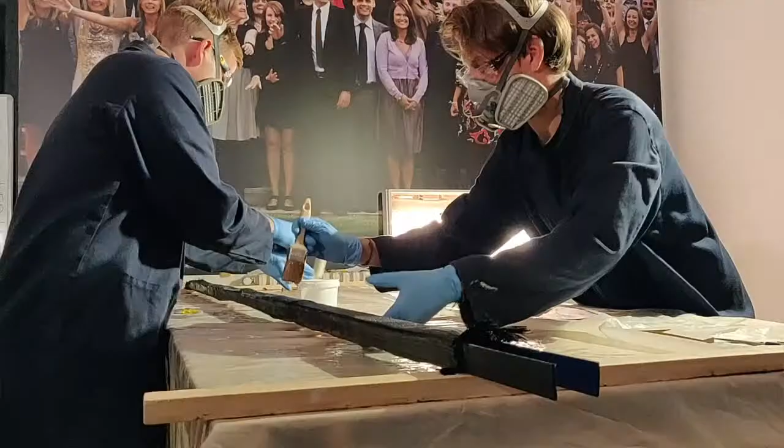Do I see hydrogen as the future? Very difficult for me to predict, but I'm pretty sure it will be one of the more important fuels this world will run on, besides others like electricity, wind, and the powers of nature. I really do believe it's important to invest in innovative aviation, because aviation, traveling, flying, is in our genes, and if you can do this in a more environmentally friendly way, I think that matters for us, but also for the generations to come.

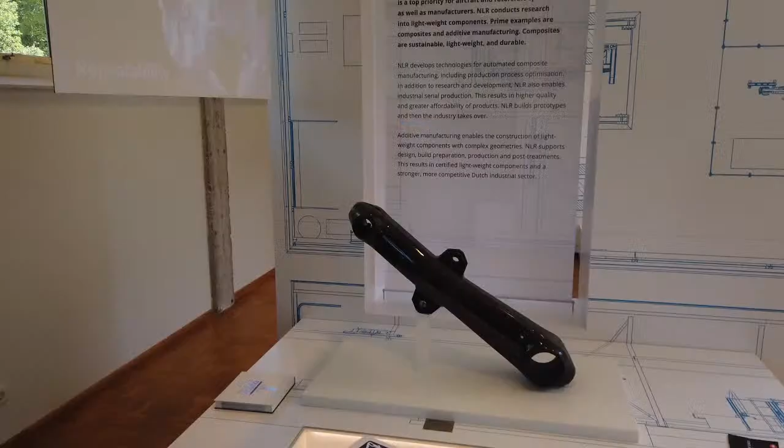The Royal Netherlands Aerospace Centre is an ambitious knowledge organization for more than 100 years. 2 years ago, we became Royal, and we try to contribute to make aerospace more sustainable, more efficient, more effective, and of course, safer.

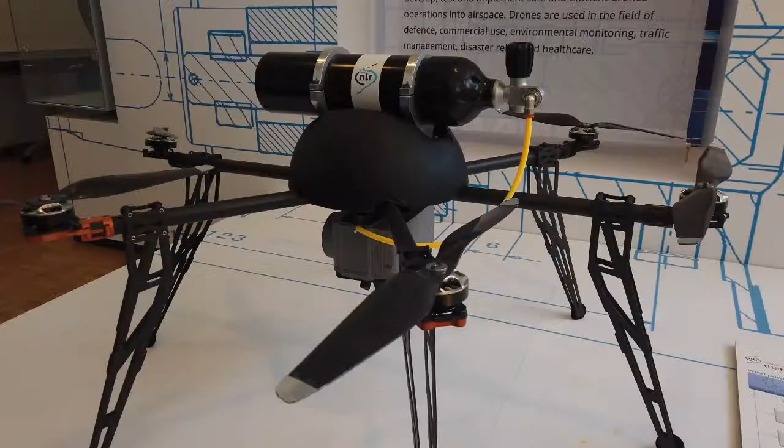Well, I think testing is the key thing. If you're not able to test, you can't improve your system, you can't improve the processes. And of course, the main thing is, I think, you will learn from your failures. And if you're not making failures, you won't learn. So testing is key. And it's not just one time testing, testing, testing.

My name is Henri Werij and I'm the Dean of the Faculty of Aerospace Engineering at Delft University of Technology.

Being a university and a Faculty of Aerospace Engineering, our main focus is to educate new students, bring them the right knowledge, the right mindset, DNA, and to do state-of-the-art research, and have impact on aerospace worldwide.

Try new things, try risky things. I'm not talking about safety, but technically a bit risky, and you bring parties together. I think this is something really wonderful about what AeroDelft is doing as well. You bring together students, people from our faculty, but also industry. Actually, you bring the whole ecosystem together, just like what we are doing in our Aerospace Innovation Hub.

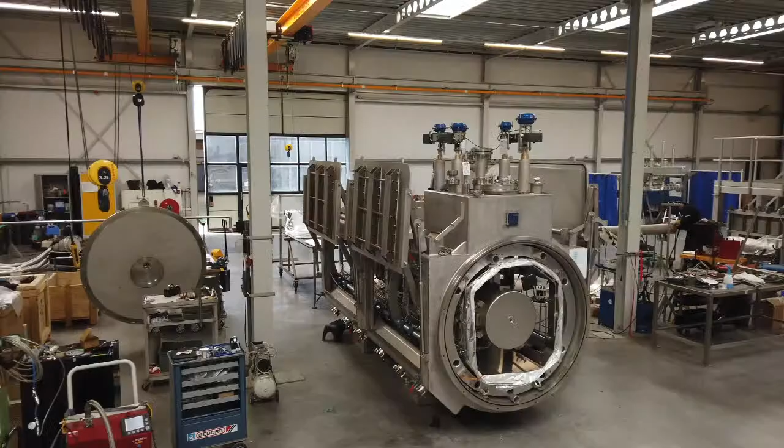Hydrogen has some particular risks, and that is it explodes quite easily. But as long as you keep it contained, the risks are really very low. You have to observe certain extra measures compared to standard fuels like gasoline or kerosene. But once you do that, it's a safe fuel. It's not more unsafe or less safe than gasoline.

Rotterdam The Hague Innovation Airport is an innovation platform for sustainable aviation. For sustainable aviation, it's very important to continuously innovate.

One of our iconic projects is SAF, Synthetic Aviation Fuels. Our partners within RHIA, the airport, Zenit, SkyNRG, Uniper, they try to realize a demonstration plant for synthetic aviation fuels which are circular.

We are an aircraft leasing company in the sense that what we do is we manage aircraft for investors that seek to find an acceptable return by investing in aircraft that are leased to these airlines.

It can't go on like this, and so there's, I guess, a human desire to do something good for humanity. As we can at least see it now, it looks like hydrogen-powered aircraft are the future.

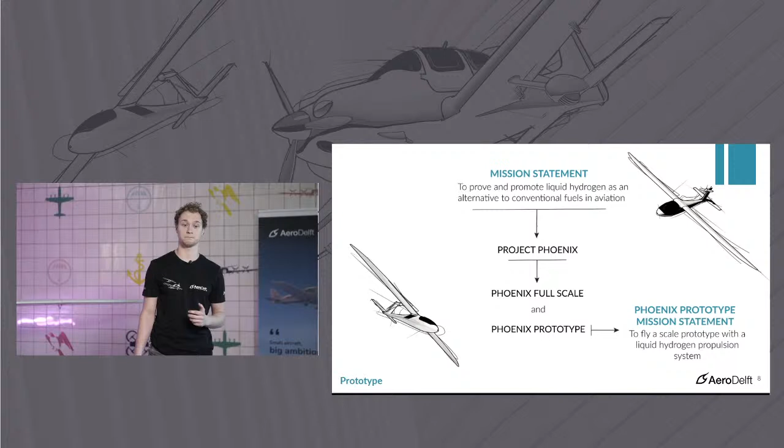So the Phoenix Prototype, or PT for short, is a 1:3 scale E-Genius glider plane with a max takeoff weight of 50 kilograms, a wingspan of 5.7 meters and a length of 2.7 meters. Although it's a drone, it's still a pretty big boy. Ultimately she will be flying with 3 different propulsion configurations: first batteries, then gaseous hydrogen, and then finally liquid hydrogen.

So here is a rough timeline of what we will be doing. Like I said, we're ultimately going to be flying, but that will be coming next year. In these past years we've made great progress to ultimately take to the skies. From the founding of Project Phoenix in 2019 to about a year ago, we consider that the initiation and design phase. This past year we consider the production phase and subsystem testing phase. Next year we will enter the full system testing and flight testing phase.

So like I said, this year was the production phase. Earlier this year I had the honor to reveal to you the prototype aircraft. At that point it looked beautiful, but it was not fully ready yet to take to the sky. We had major parts of the airframe, but it was not nearly at a point that we could take off. So since then, we have been taking big steps to be able to fly.

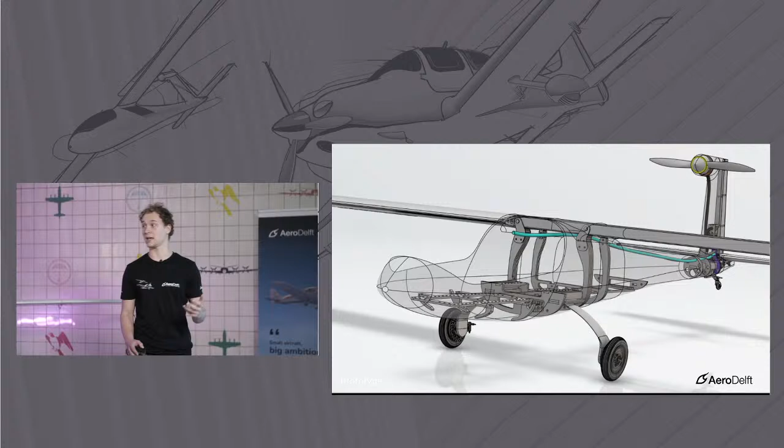It's a similar story for our tail landing gear. Here you see a drop test, and it flexed way more than it should have. But we don't see this as a failure, we see this as a learning moment. Like they said at the NLR, you need to test and test and test to be able to make a better product.

So we went back to the drawing board, designed new landing gear, and ultimately we created this. Here you can see the new landing gear leg, which dwarfs the old landing gear leg. We really believe that the new landing gear legs will be able to take the force that they will need to.

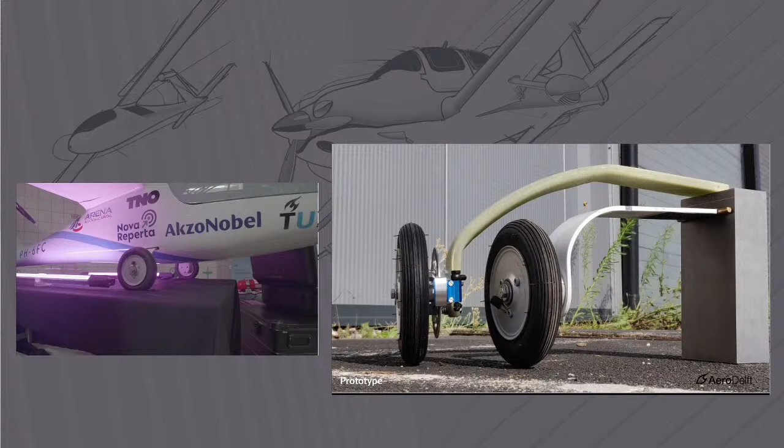So now you can see right here next to me is the prototype aircraft. If you zoom out a little bit, you can see that the aircraft looks quite similar to what it looked like when we first released it. But there's many different changes that have been made now. It looks quite similar, but it's now much closer to being ready to take to the sky.

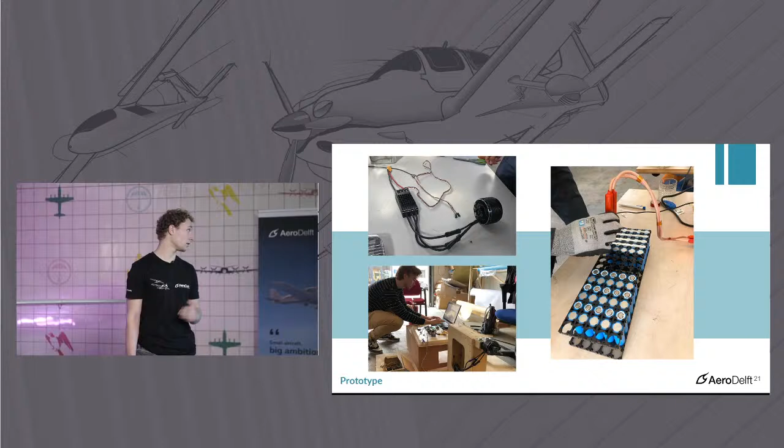In addition to all of the structures department progress, the electronics control department has also been making a lot of progress. We have most of our hardware done now. The motor is in, the electronic speed controller, and also a lot of the circuit boards and wiring has been completed. We also recently built our cruise battery, which will be the main replacement for our battery-only flight for the fuel cell. But much of electronics and control development is designing these circuit boards and wiring diagrams and coding, and more coding.

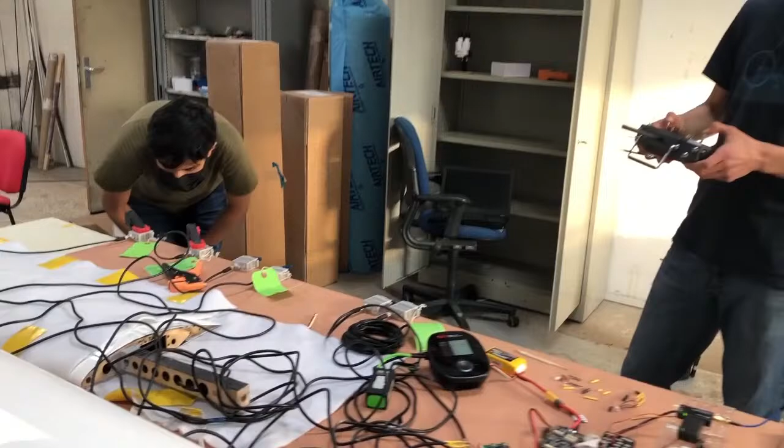There's not a lot very interesting to show there visually, but ultimately that all culminates in tests such as what you see here. This is one of our servos tests. The servos will allow us to move the control surfaces of the aircraft from the ground. Tests like these are very valuable for us to understand how these systems work, make sure that they work well, and also prepare them for integration.

We've also been doing a lot of extra testing at the electronic control department. Here you can see a photo from right before our prototype of prototype test. We dubbed it this because we are taking some of the control elements from our Phoenix prototype aircraft and putting them in an even smaller aircraft to test them.

Tests don't always go exactly the way we want them to, but like I said, we learn from them, we improve, we continue, and ultimately we're able to take to the sky, as you can see here. This was some footage from this test, and this allows us to understand much better how these systems will work when we actually integrate them into the aircraft. We can make sure that the modes that we were working with and everything is up to par.

Also recently, we had the chance to be able to start testing our motor. The motor is quite powerful, and at the testing, we were really interested to see how powerful this was. Also, tests like this allow us to get a feeling for the temperature that these get to, which is of course very important when we integrate it into an enclosed space.

Ultimately, after that test, we integrated that into our aircraft. That was a really amazing moment, and really here you see the melding of the structures department and the electronics control department. So what we did here is we did some of our first taxiing tests.

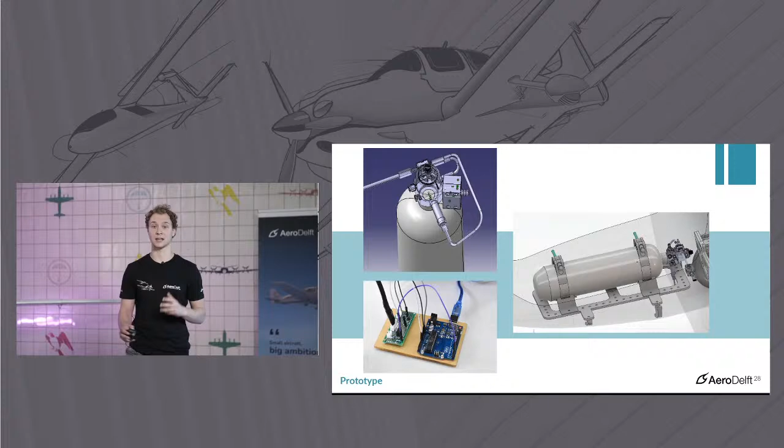In addition to all of the great progress that has been made regarding electronics and the structure, we've also been taking big steps regarding our hydrogen propulsion systems. We have two systems we're working on, our gaseous hydrogen system and our liquid hydrogen system. Regarding the gaseous hydrogen system, we have basically finalized the system. All of the electronics and the integration and also the components that allow all the components to work together are all now done. Also, we've been able to test the hydrogen propulsion system many times now.

Specifically, the fuel cell has been run many times, and we are very comfortable with it. Also, thanks to our partner NLR, we've been able to run the full system outside of the aircraft, and we've now reached a maximum power of 1500 watts. Right here next to me, you can see the gaseous hydrogen system. Soon, after our battery-only flight testing, this system will be integrated into the aircraft and will serve as the main power source. We're very proud of the progress we've made here thus far.

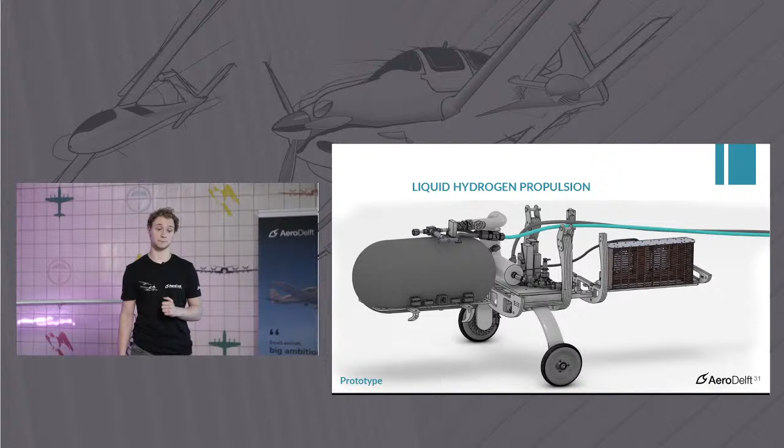So then, our final step, liquid hydrogen propulsion. The liquid hydrogen system has many complex pieces of machinery. The main one is, of course, the tank. Building a tank for liquid hydrogen is not very easy and requires a lot of precision. Luckily, after some learning moments, we believe we can now build this tank flawlessly. Also, the inlet to the tank, which is very important when working with liquid hydrogen, has now had its design finalized, and we will soon be able to begin production.

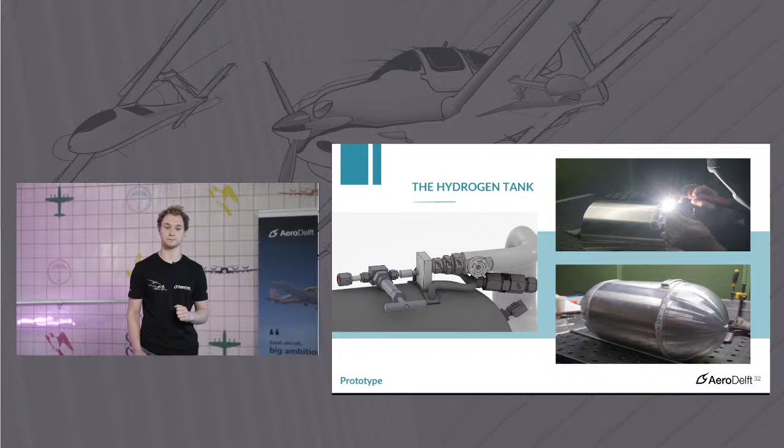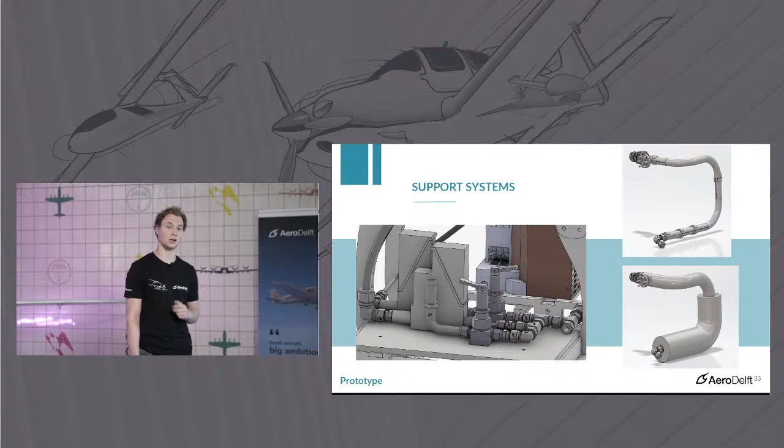There are also many support systems within the liquid hydrogen propulsion system. These require a lot of engineering work, and without them the system would not work. Here you can see two of these elements. First, the valves assembly, a subsystem which will regulate the pressure of the hydrogen in the system. You can also see two images of the heat exchanger, which will heat up the very cold hydrogen in the system. These are some of the main elements of the hydrogen propulsion system, including the fuel cell, which I already said we are very comfortable with. All these elements together will allow us to fly on liquid hydrogen. This really is a one-of-a-kind system, and we're very proud of the developments we've made here. This is really cutting-edge technology, if I say so myself.

So ultimately, for all the things I've talked about to be able to fly, we've been looking into certification. This is, of course, a very important thing. Certification includes documentation, safety analyses, registration, and testing, testing, testing, in the famous words of the NLR. Later in this event, we will have a panel discussion where you'll learn more about what they do and the challenges they face.

So that was a brief overview of the progress we've made this year. So much was done by the amazing prototype engineers that I couldn't cover today in this short presentation. But for now, we focus on the future.

This presentation, sadly, is a little— oh, this is perfect. I got some information that the presentation was old, but they fixed it, which is amazing from our technical staff. But so we look towards the future, like I said.

We will be having three separate flight testing phases, as I discussed earlier. First, we will be flying on battery power. During this flight, we are really trying to test the electronics and make sure our aircraft is a good testing bed for the future hydrogen propulsion systems. Then the next phase is gaseous hydrogen. As I already showed, the gaseous hydrogen system is nearly ready and will be integrated into the aircraft after we complete our battery-only flight testing. This will mark AeroDelft's first gaseous hydrogen flight.

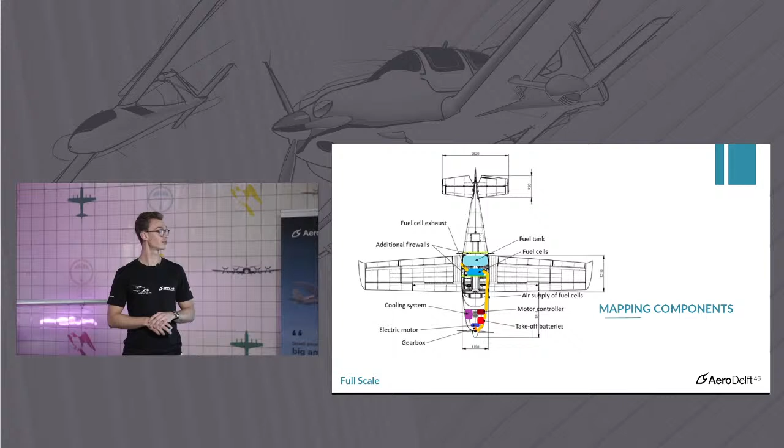The air that is needed is supplied from the front of the aircraft, where you also have our batteries and electric motor located. Of course, it was time for us to move on and really get started with the work itself, so we started making connections with companies, because our aircraft can only fly on hydrogen with very advanced technologies and lightweight components.

To put our needs into perspective, our Phoenix prototype needs 1,500 watts to take off, whereas our Phoenix Full Scale requires 100,000 watts of power just to take off, which is 60 times as powerful.

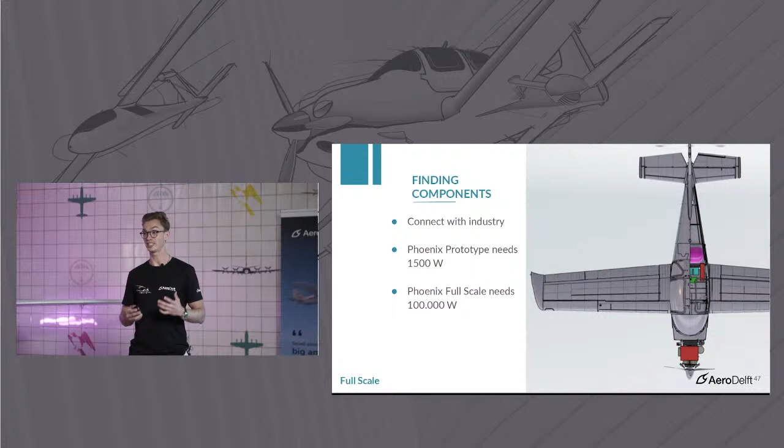But when you're looking for more power, you're also looking for more trouble, and this is something we definitely experienced. Our fuel cell system, this blue box you see right here, was 170 kilograms, and it did not fit in our aircraft. We felt lost and thought, how are we going to make this work?

We decided to do what we engineers are good at: think outside of the box. We literally came to the conclusion to take apart this box, and so we did, together with PowerCell, which resulted in the following: all the hydrogen components were placed in our hydrogen area and isolated from the cabin with a special wall called a firewall.

Of course, to produce electricity we also need air in the most perfect condition. Those components are placed in the front of the aircraft. But we also need hydrogen.

So let's take a look at the next puzzle piece, which is our hydrogen tank. This is the tank we selected. It can store 1.25 kilograms of gaseous hydrogen under a pressure of 350 bars and has a total mass of 30 kilograms. Together with Luxfer, we are adapting it to the needs of Phoenix Full Scale.

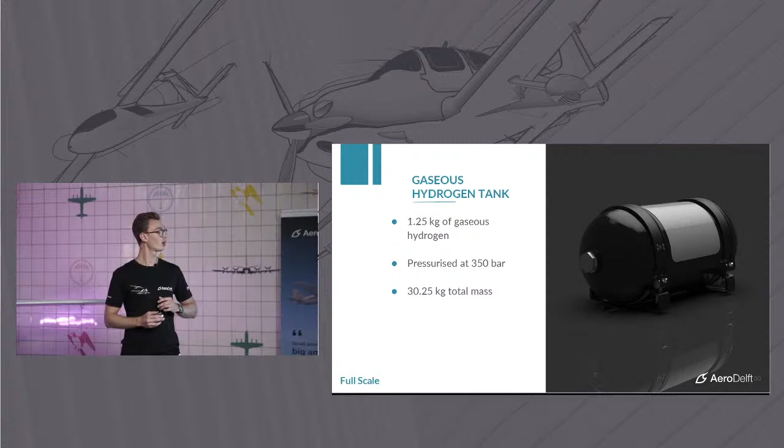Once we created the electricity on board the aircraft, we have to transfer it to our electric motors, but it needs to be adapted to a fuel cell system. For that, we got in touch with a Dutch startup called Saluqi Motors, which is creating a very cutting-edge motor technology that can be adapted to a fuel cell.

Together with another team in Delft that is creating an electric aircraft, we are actually integrating this electric powertrain into the aircraft. However, let's take a look at how all these and many other puzzle pieces actually come together in our design.

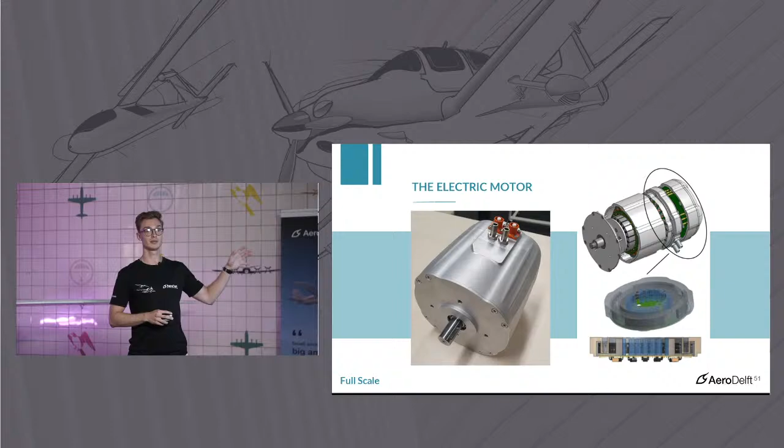Later in the event, there will be a VR tour to give you some more insights into how this design actually looks like. However, the question still remains, is this all that we need for a hydrogen electric aircraft? The simple answer is no.

There's a risk that hydrogen starts accumulating and a hydrogen flame starts, and this flame is not a normal flame, but is of a temperature of 2000 degrees Celsius. This is where a specially designed firewall came into place, because it prevents the hydrogen from spreading and makes sure that the pilot is protected at all times.

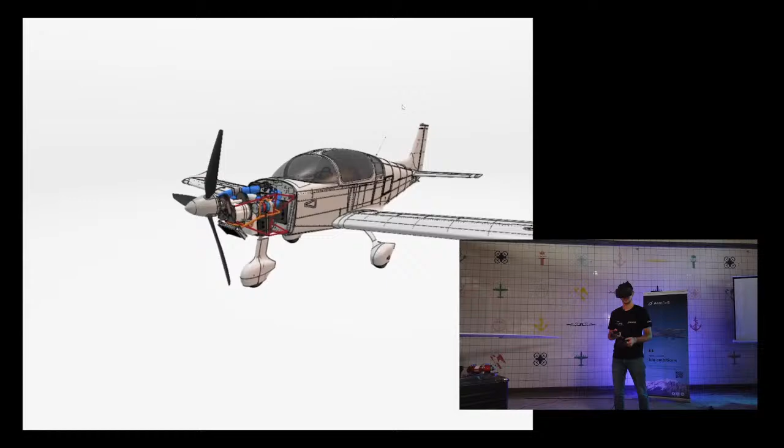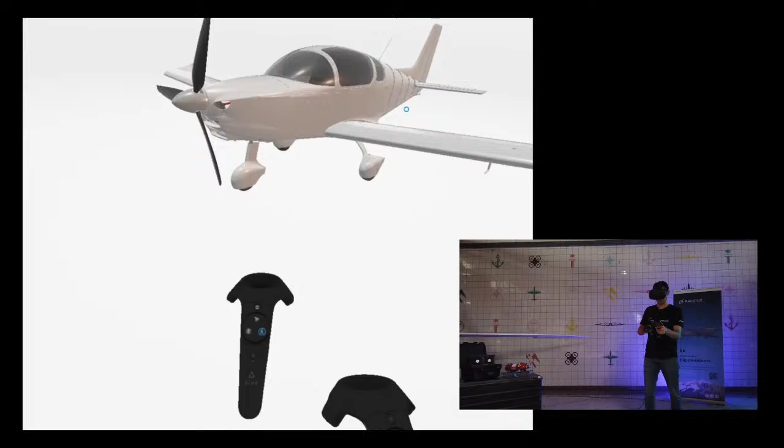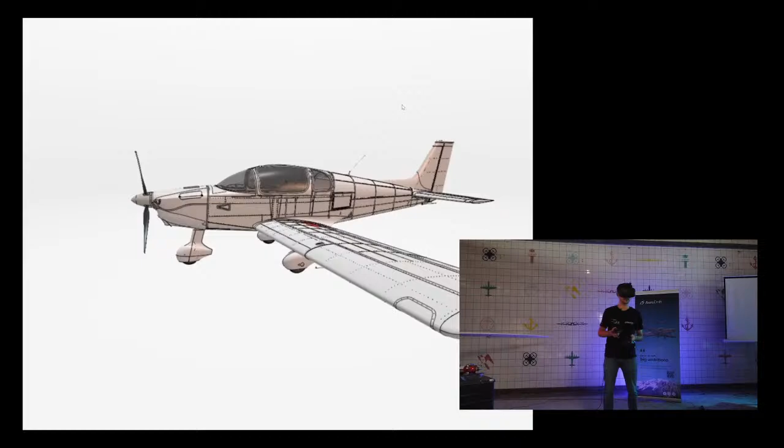Let me show it in full. So the Sling 4 is a 4-seater aircraft in its original configuration. What we are doing is converting it to a 2-seater aircraft that will run on hydrogen. Today, me and Alex will show you how the current configuration looks and what components are inside the actual aircraft. We'll start at the very front of the airplane, just behind the propellers.

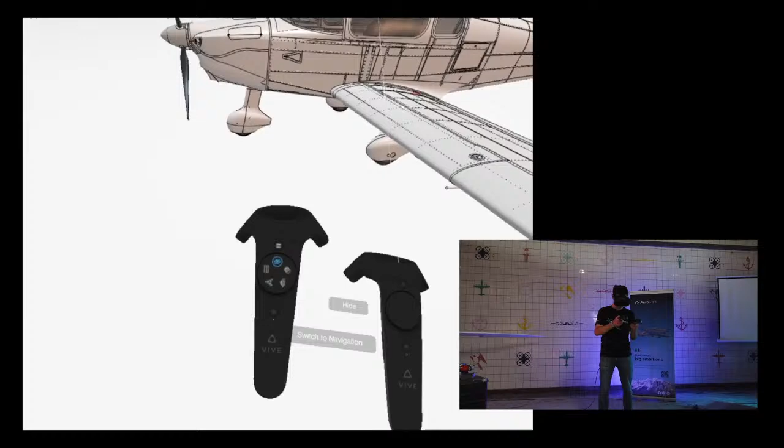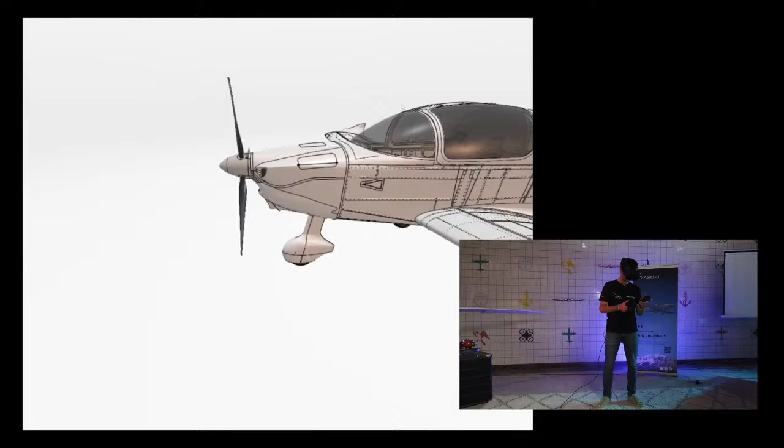This is the location where in the original airplane the combustion engine is located, which we of course don't need because we will use a fuel cell instead. So we have replaced it with some other components, which you will see in just a bit.

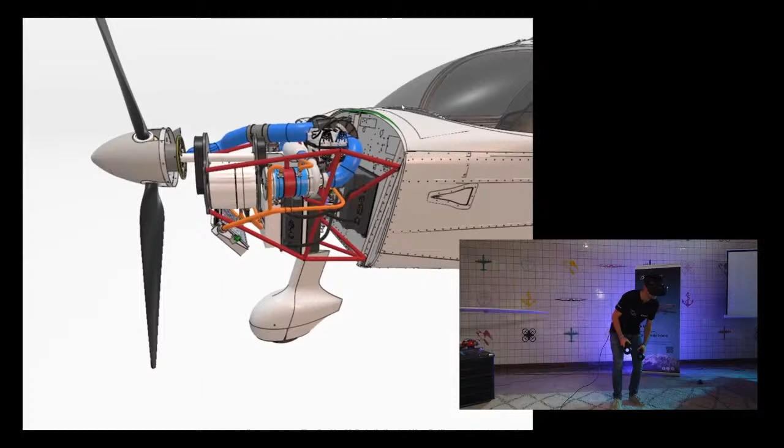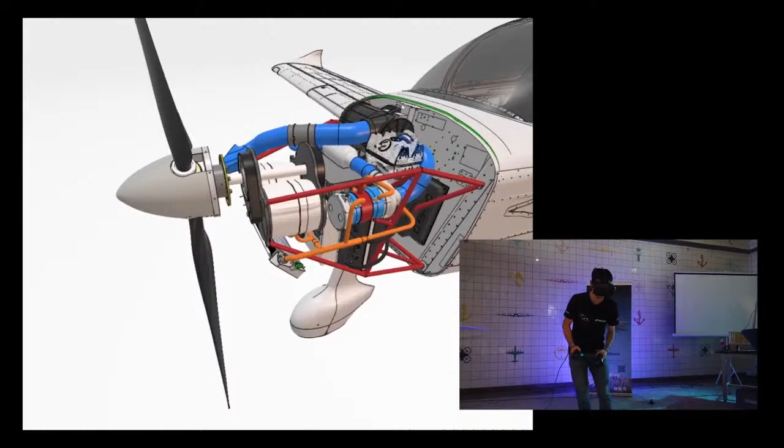Let's move a bit closer so we can all take a good look at the components inside. The first thing you will probably see are the electric motors just behind the propeller. The fuel cell generates electricity, and we use that to drive these electric motors to ensure good performance of the aircraft. You can also see there are actually two of them - these are electric motors delivered by Saluqi, one of our partners, joined together with a twin assembly, as we call it.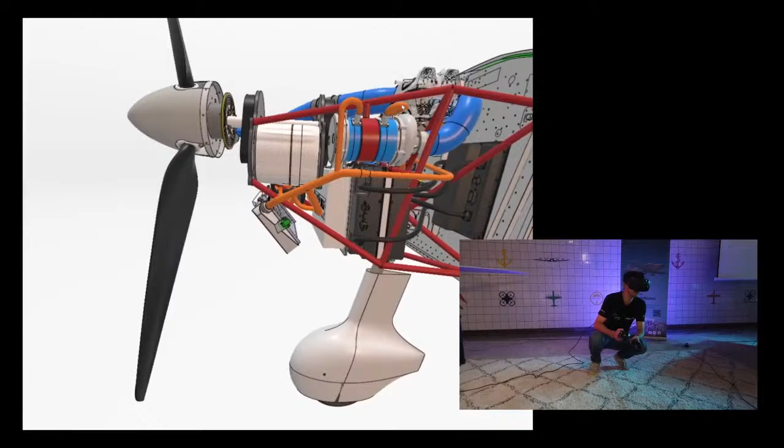Just behind and underneath the electric motor you can see some black and white boxes - these are actually the batteries of the aircraft. Our aircraft needs these batteries for a little bit of extra power during takeoff and sometimes to taxi, or just when we need power that's not coming from the fuel cell. We have two batteries, and just in front is a DC-DC converter, which basically makes sure the batteries can be used together with the fuel cell.

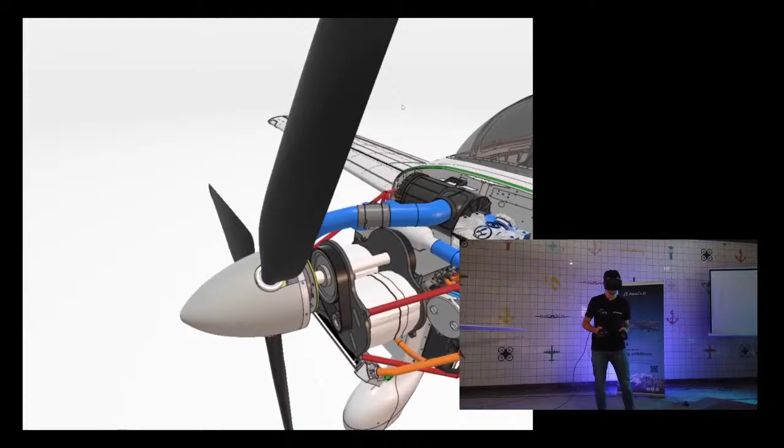There's also some red stuff you can see inside the nose of the aircraft - this is the frame used to mount the motor to the firewall, to the main structure of our aircraft, together with all the other components inside the nose.

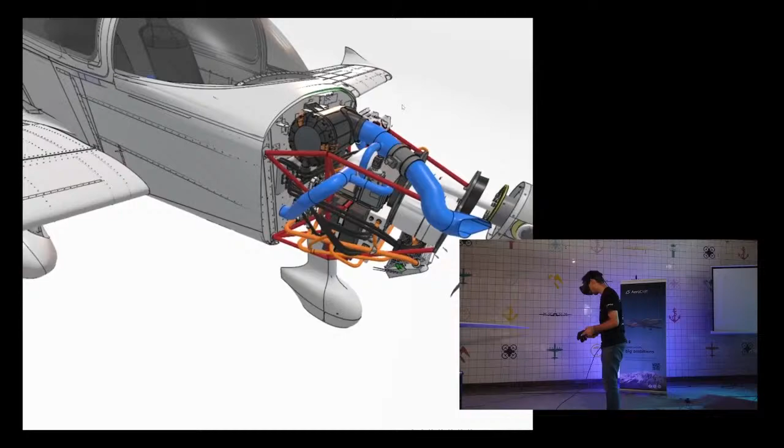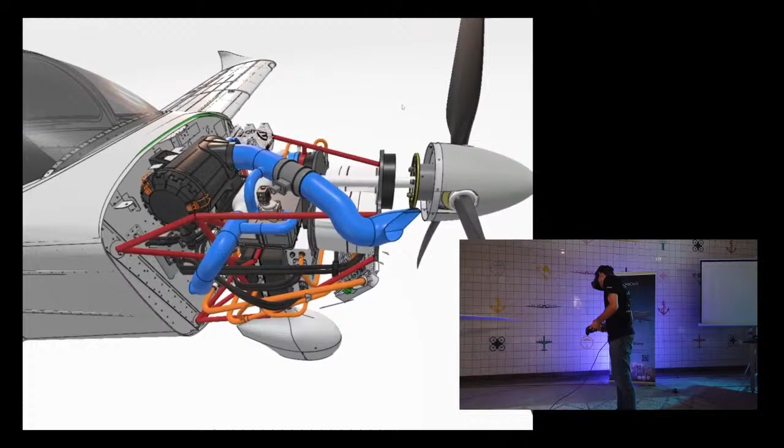So what are these other components? There's a lot of stuff that's different from the batteries or electric motors. We have the components needed for the air intake of our fuel cell - you can see blue piping used to drive the air from just behind the propeller to the air filter, the black cylinder on top, and then just behind is a compressor, and it goes to an intercooler. Basically these are fancy components we use to make sure the air can be used inside the fuel cell itself.

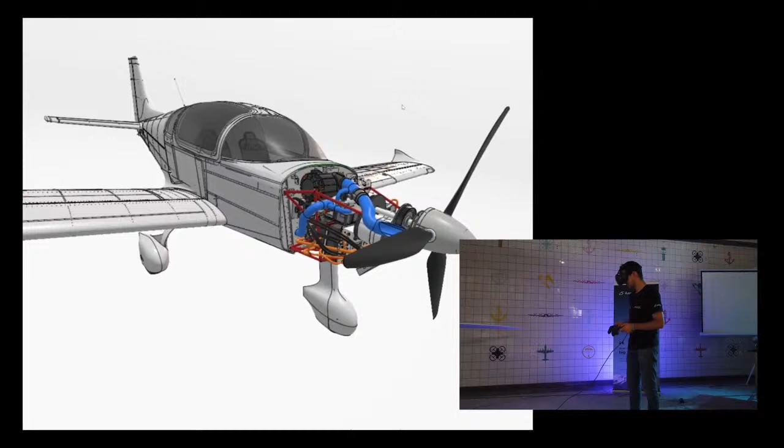The fuel cell itself is not located in the nose of the aircraft - you can already see it's quite crowded in there, with a lot of components needed. So we had to put the fuel cell somewhere else, just behind the pilots. But before we go there, the last thing I almost forgot is the orange piping - there's a lot of it, and this is the low temperature cooling loop. This makes sure all the components inside the nose are cooled down and don't overheat, and it's cooled down by the air coming into the radiator that you can see in the front.

Wow, that's already a lot of components. Yeah, it's a lot.

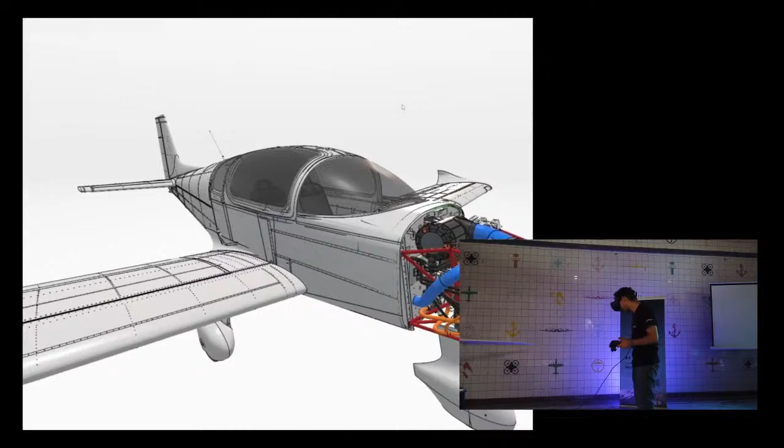Just in that comparably small nose. Very cool. All right. Alex, are you ready? Yeah, I want to look at it a bit longer, but I think we have to move on at some point. So yeah, sure. Let's see what else we have in this airplane.

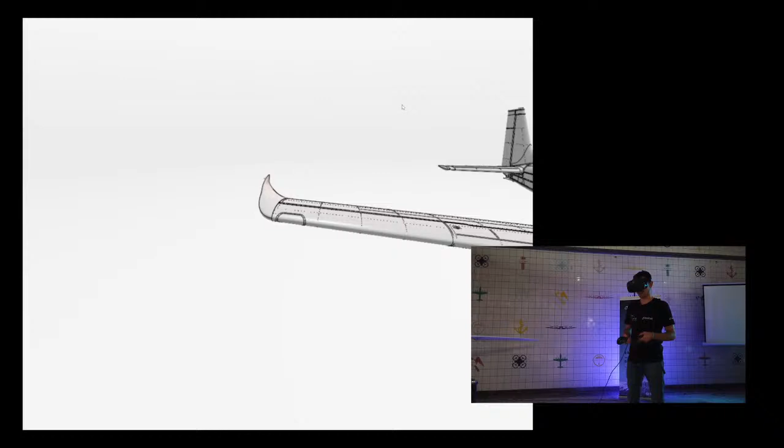All right, you cool, want to go a bit to the back, or? Yeah, if you can move a little bit just around the wings of the aircraft. There's some other very interesting stuff there for us to take a look at. Maybe I can go a bit higher.

So as I told already before, the fuel cell cannot fit inside the nose. We would love to have it inside the nose, but there's not enough room. So therefore, the best location to store the fuel cell is just behind the pilots.

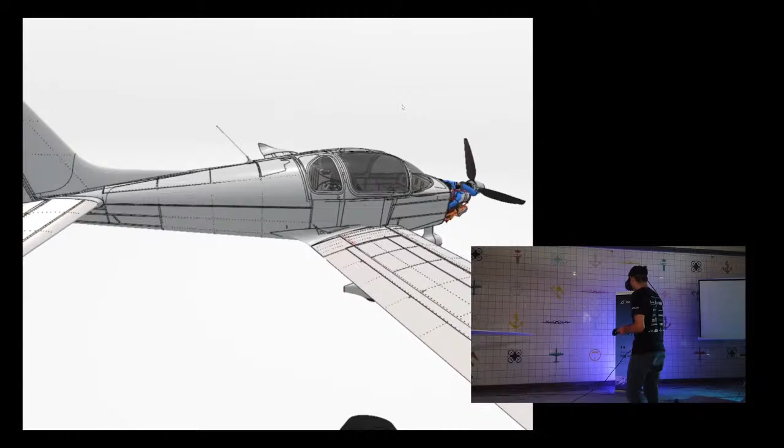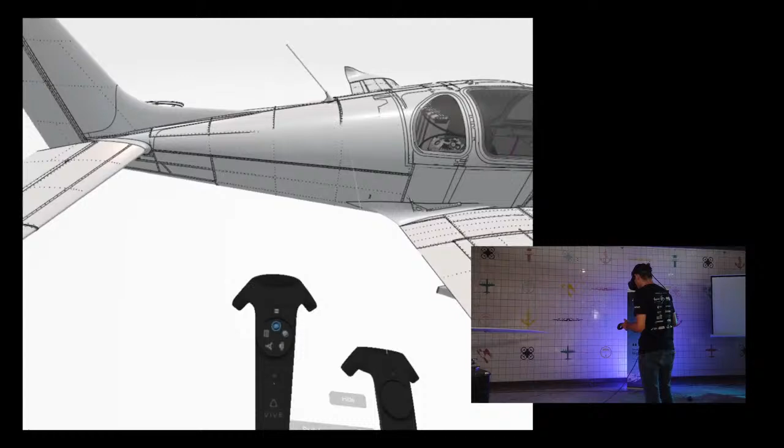So if you can zoom in a bit and remove some of the fuselage, some of the aluminium or the framework of the aircraft, we can take a look at what's inside. Sure, I'll be here. So just remove it piece by piece. All right, so there's already some very interesting stuff popping up right there.

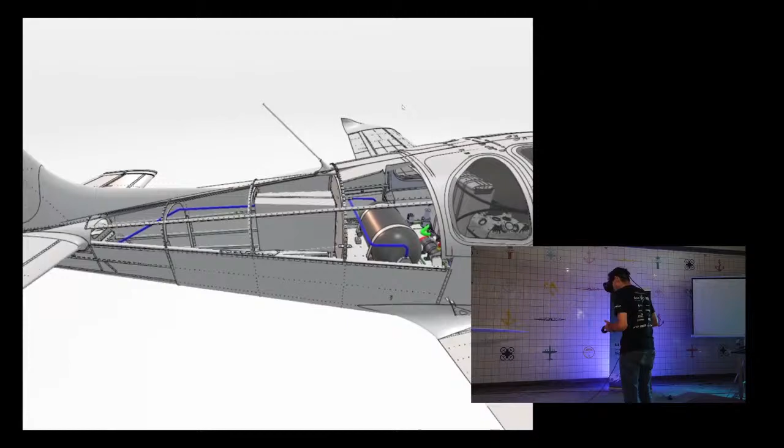Yeah, cool. All right, so what you see here, just in front of you, is the pressure vessel, or more commonly known as the tank. This is a conceptual version of the actual tank that will be inside our airplane.

So we have two ways to store hydrogen, as was already explained. You can store it as gaseous at 350 bars, or as liquid hydrogen, which you need to cool down a lot. The one you see here is a gaseous pressure vessel. It makes sure that our hydrogen is kept safe, and it will then be transported into the fuel cell, where it will be used to generate electricity.

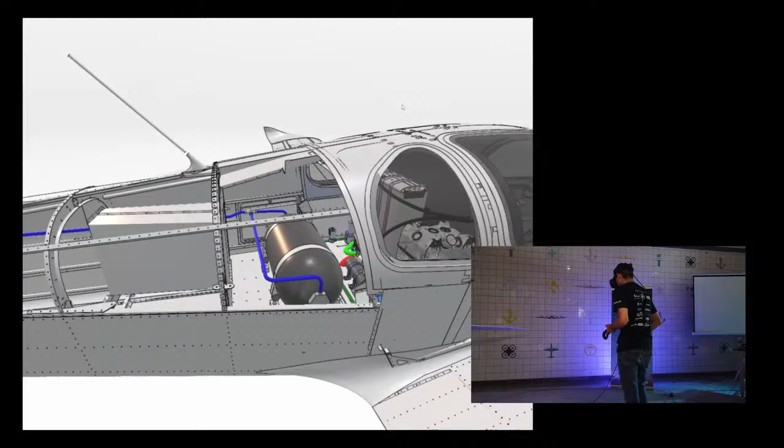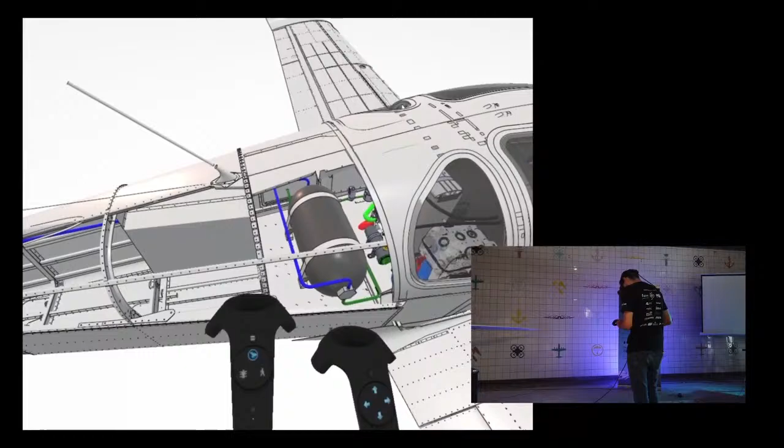So you see two lines. If you hover a bit over it, we can actually see it a bit better. Like this? Yeah, so you can see that there are two connections to the fuel cell. You have the blue lines and you have the green lines. The green lines are what we call the fuel lines. So when these lines are open, it will transport the hydrogen from the tank to the fuel cell.

And the other lines are the venting lines. Basically what venting is, and we'll come to that towards the end of this tour, is when we don't want the hydrogen anymore inside our aircraft, once we want to get rid of it, we use these lines to very rapidly dispose of the gas behind the aircraft. But that's, I'll explain in a bit more time. Let's first take a look at all the interesting components that are in front of the tank.

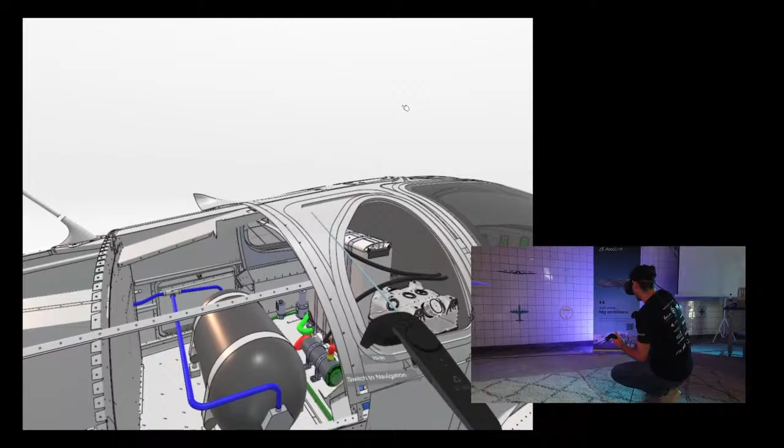All right, sure, should I remove some more parts maybe? Yeah, so we can see a bit more. Yeah, that's a good idea. Just start blasting them away. It's a lot of parts. Maybe I can even remove this one.

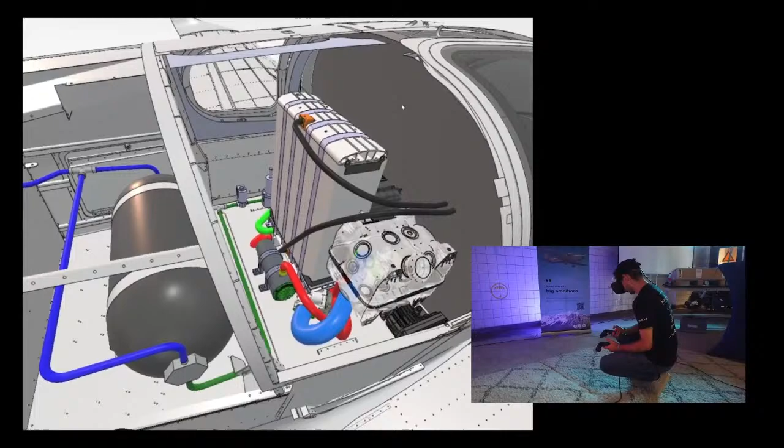Cool, all right, so you see a lot of different colors here, so a lot of interesting components. And the most prominent one is, of course, the fuel cell, which you probably already have noticed, and that's the big white box in the middle. And all the components around it, they are there to support the fuel cell. The fuel cell is really the heart of our airplane. It's the thing that makes it fly, and the most important part to what we're doing here at AeroDelft.

Nice. And around it are all kinds of components that we need to make sure the fuel cell operates properly. So if you see just in front of the fuel cell, it's a black box called the humidifier, and it actually makes sure that our fuel cell doesn't dry out, which is very important, otherwise the fuel cell will fail.

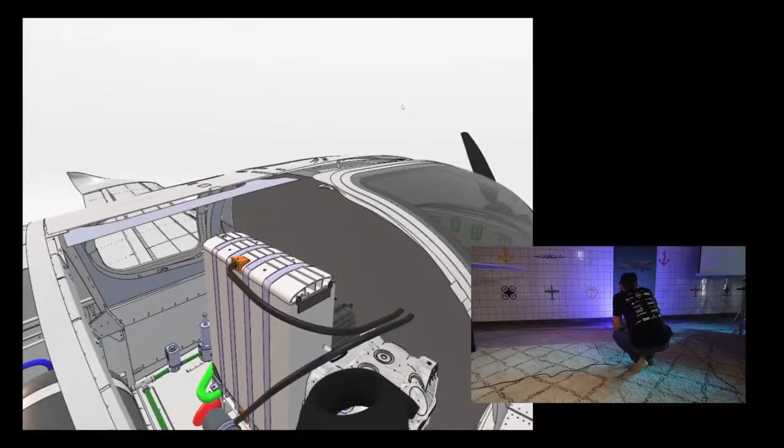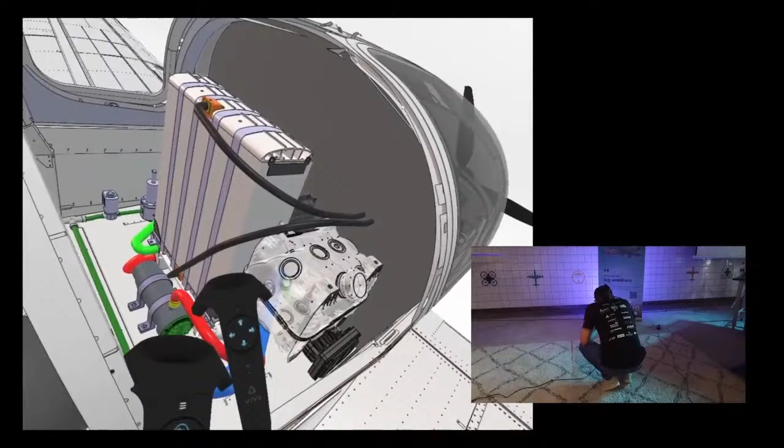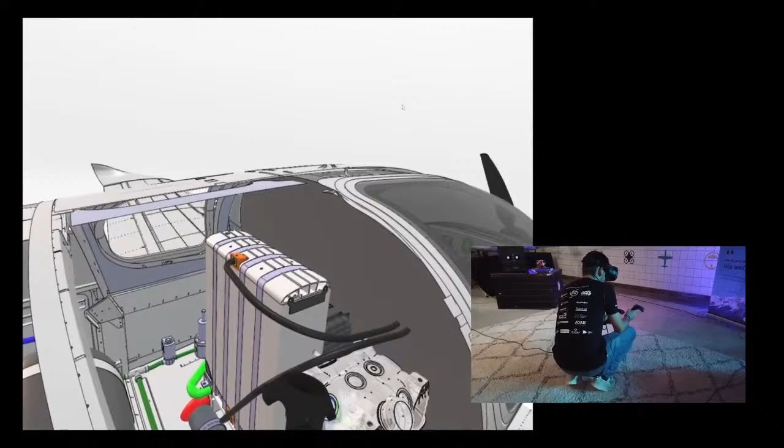And there's also another very interesting component that's between the pilots and the fuel cell. It's called the firewall, and that's the grey one. Yeah, so the big grey plane you see is a firewall that is being made by AeroDelft members themselves and tested. And the reason we have it there is that if we're in a very emergency situation where we might have a leak or even a small fire inside the cabin, there's always a firewall there to make sure the pilots are completely protected and so that they can land the aircraft in due time. So that's the function of the big grey wall you see there.

And we have some other components as well. So just out of the tanks that we just talked about, there are some valves and a pressure regulator that makes sure the pressure of the hydrogen is so low that we can use it inside the fuel cell.

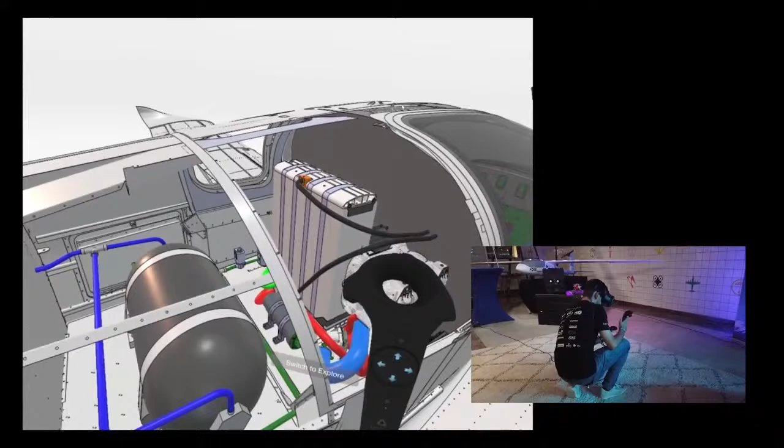And we also have some red piping, and the red piping is needed so we can cool down the fuel cell. So you already saw the orange piping we just talked about, which makes sure the components in the nose are cool. And the red piping is to make sure the components inside the cabin are cool, mainly the fuel cell.

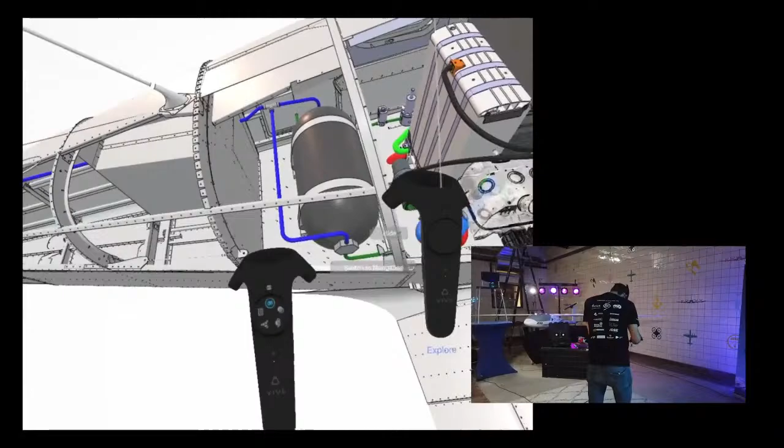If you remove the floor, the gray stuff just below the fuel cell, you can actually see a very interesting and complex configuration. It leads the coolant to a radiator that's part of the wing. There's actually another floor down there, another gray panel. Let's remove more of it, yeah, there you see it.

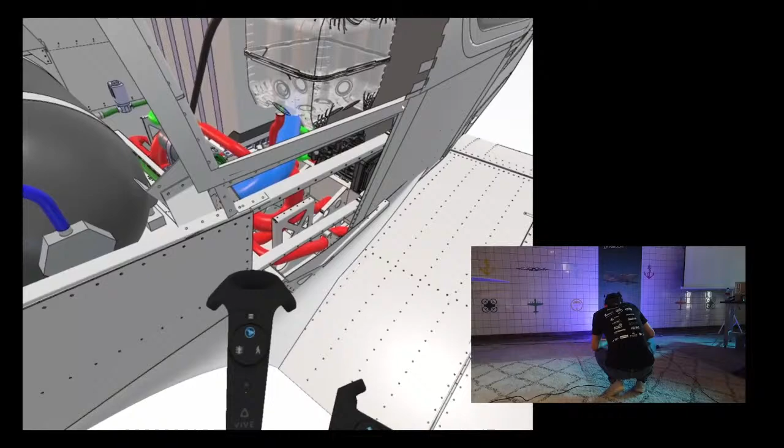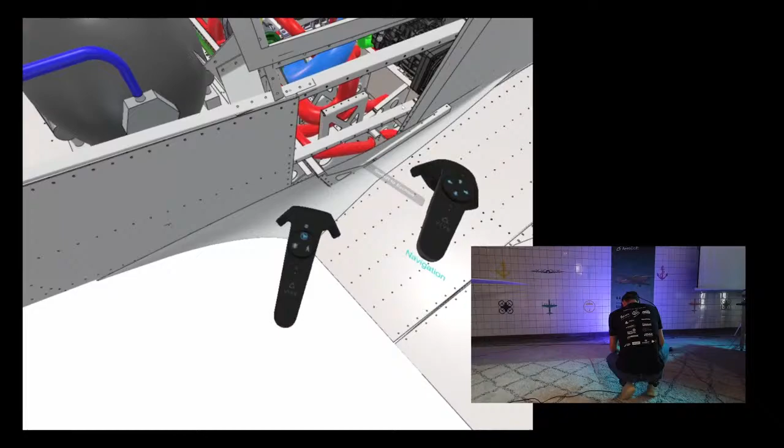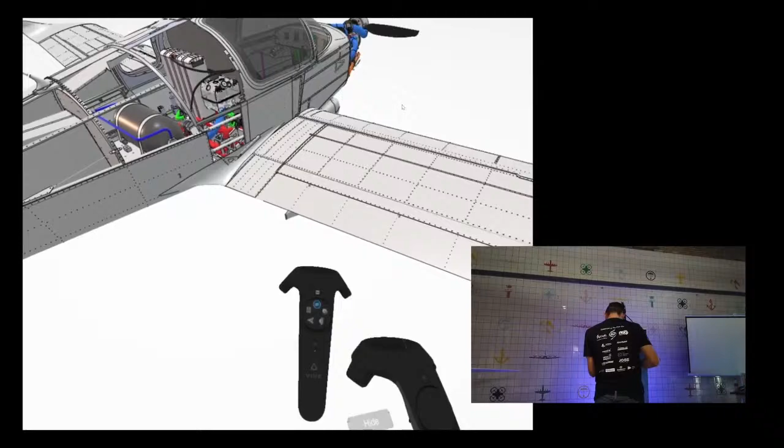There are some pumps down there and they pump the cooling fluid from the fuel cell to the wings. Because we need to cool down so much heat from the fuel cell, we had to think of a very interesting solution. If you remove some of the wing parts, preferably the middle, you can see how we integrate the radiators inside the wing of the aircraft. That's basically what it looks like, and the coolant gets cooled down by the air flowing over the wing itself, and after that it gets pumped back into the fuel cell.

Wow, that's really everything connected, huh? Yeah, it's one big system, Alex.

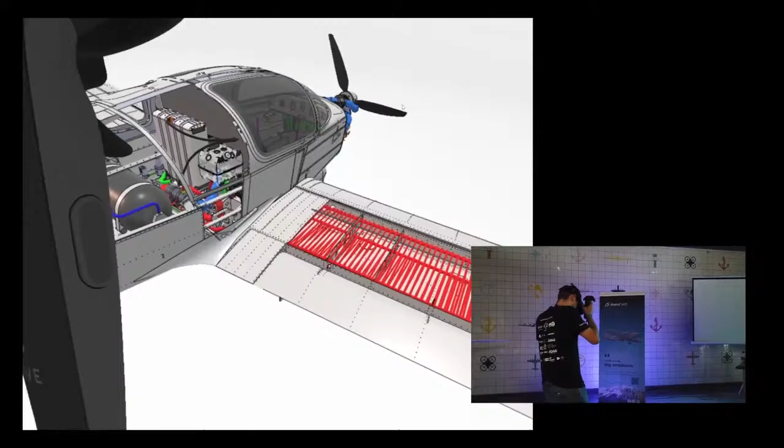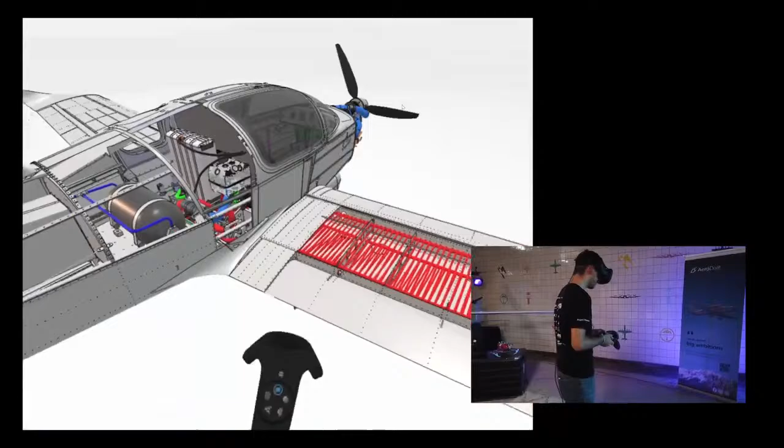Is there anything you want to ask at this point? Some interesting thoughts that have popped up inside your head? Can we go to the cockpit? Oh, of course, yeah. You want to be the pilot for once? I want to be the pilot. I'm not going to be the pilot in the real plane, so I want to be the pilot here. This is your chance. Nice.

So, unfortunately, not all the components are already inside the cockpit. Normally, it would be very cool to sit down inside the leather seats of the cockpit and have the control panel in front of you as well as the steering wheels. But there are some details that we can see, and this is actually how the cockpit, or the test pilots, will sit when the Phoenix FS takes off for the first time. Wow, that's cool, right? So cool. Not everything there that should be there in the end, but...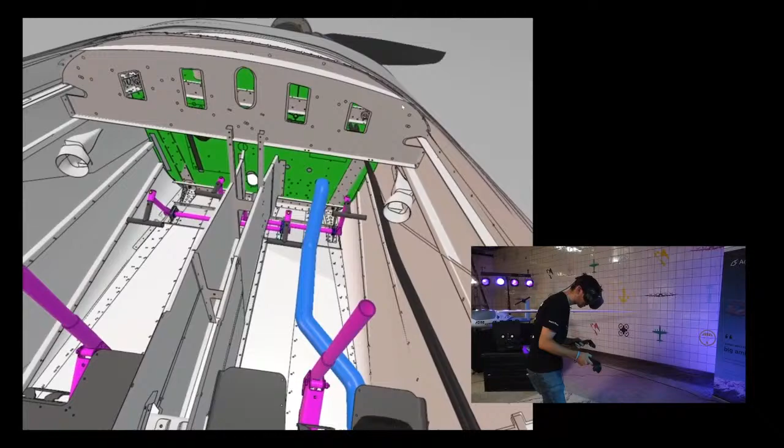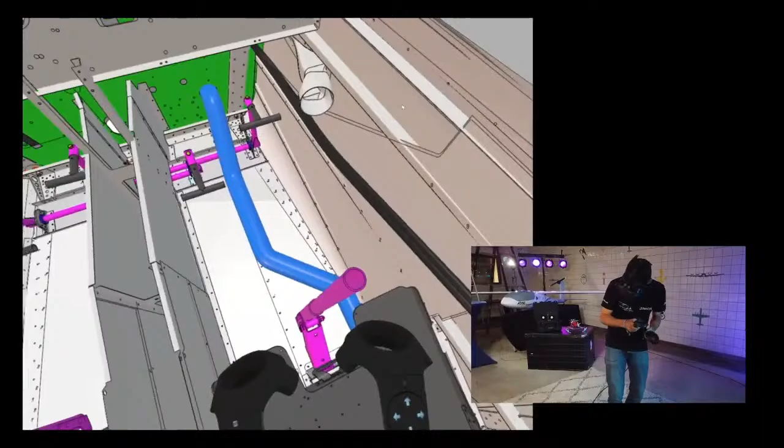Yeah, exactly. And you can actually see already two of the cables and also the piping for the air intake. As you said, everything is one big system, not different things. You see the blue piping, you see here the black cables that come from the nose, as we discussed in the beginning, and go back. And of course, the power from the fuel cell needs to go to the electric motor in the nose, and that's why it's there. That makes a lot of sense, yeah.

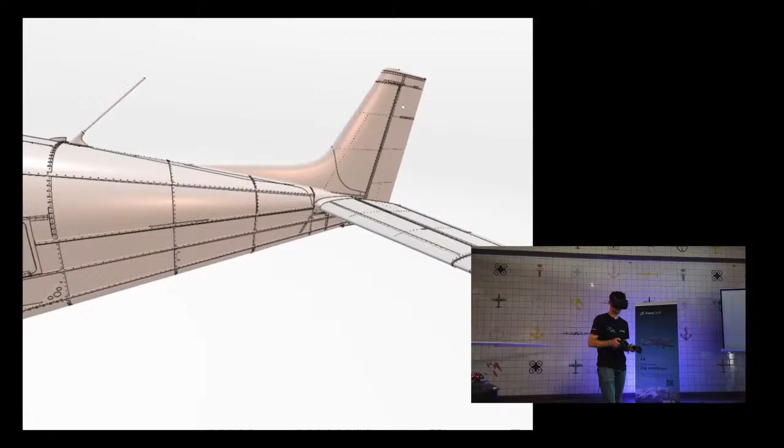All right. So if you go back to the end of the aircraft, there's one last interesting thing I can show everyone. You can actually see it already in the right side of your frame, just beneath the tail. Yeah, there you see it.

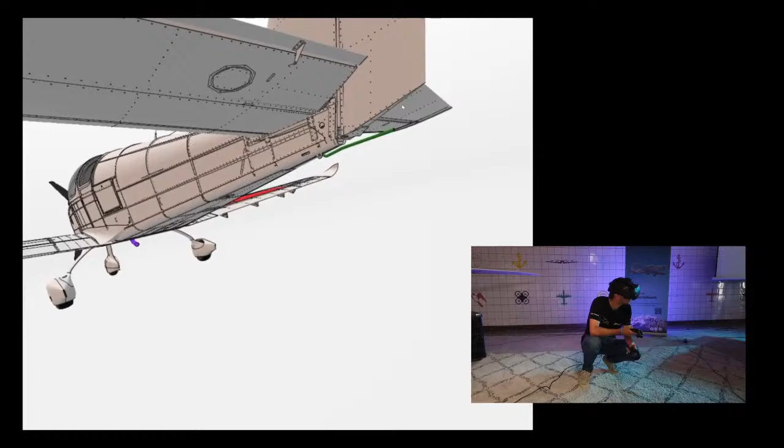So I talked about the venting at the beginning of this video. Venting is, as I just explained, when we don't want the hydrogen inside our aircraft anymore. So there are a couple of safe places to vent hydrogen outside our aircraft. And because hydrogen is very flammable and can also explode, we need to make sure to do this at the safest place possible. And from our analysis, this turned out to be the safest place.

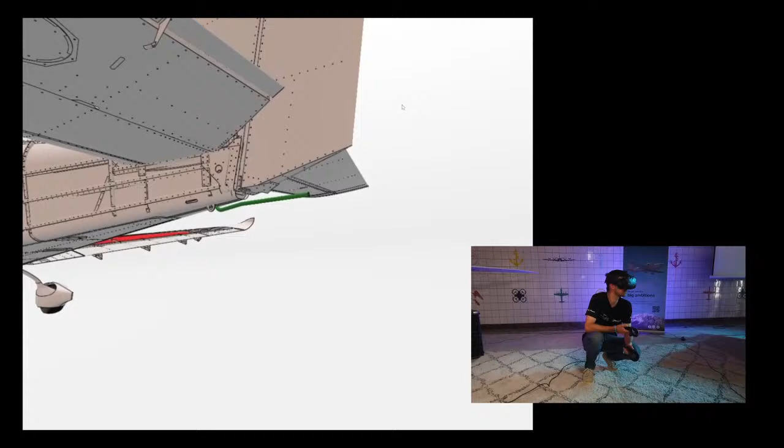So the hydrogen that leaves the aircraft, basically behind the tail at the end of the aircraft, and any plume or flame that will possibly be ignited behind the aircraft won't damage any of the critical components. There are of course some challenges. If there is a flame present just behind the aircraft, a very hot flame, because hydrogen flames are very hot, we need to protect the tail. But we are already searching for some answers on how to do this and how to best solve these problems.

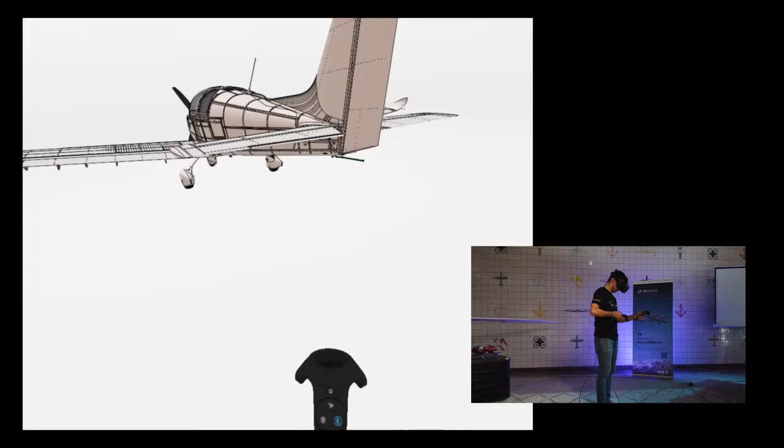All right. So yeah, maybe Alex, you want to take it for a last spin around the aircraft so people can see. Sure, I can maybe also move the perspective so you can see the whole thing. Yeah, I think that's it. I think as well. All right.

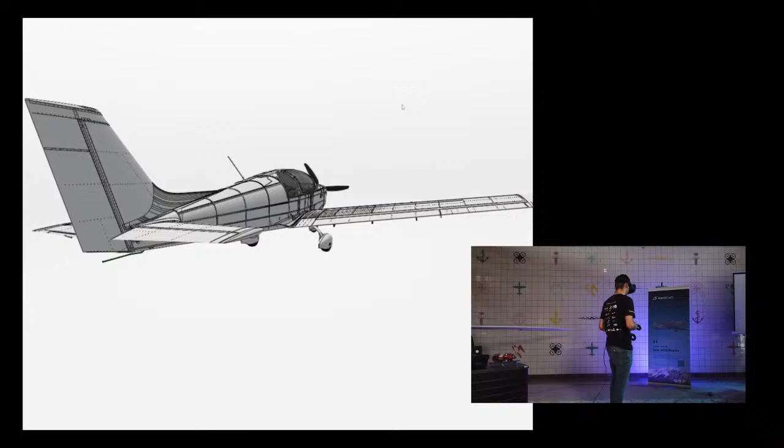Oh, it's great like this. I think it's cool, now it's good. So now you see the beautiful aircraft. We can't wait to show it to you guys in real life. It's going to be even better than this, since it's just a 3D model, and we hope we can do that in the near future.

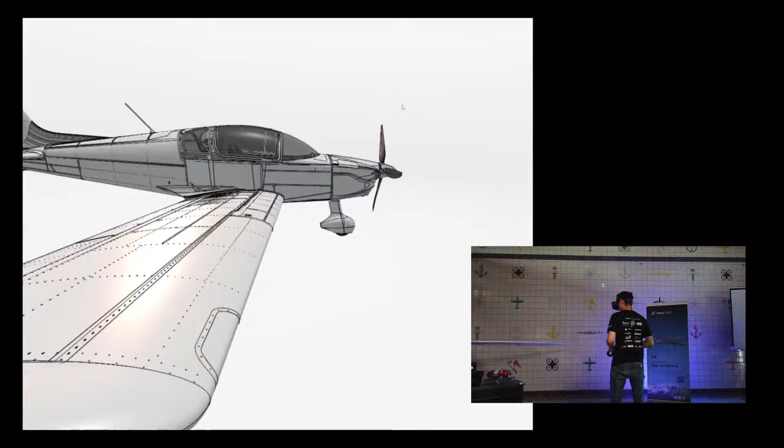What do you mean with just a 3D model? It looks very nice, you see all the parts. Sure, it's not the same as a real plane, and we can't wait for that, but I think that's great work here. That looks so cool. You can really see how it's supposed to be one day, where all the work that has been done. Yeah, really cool, really nice model.

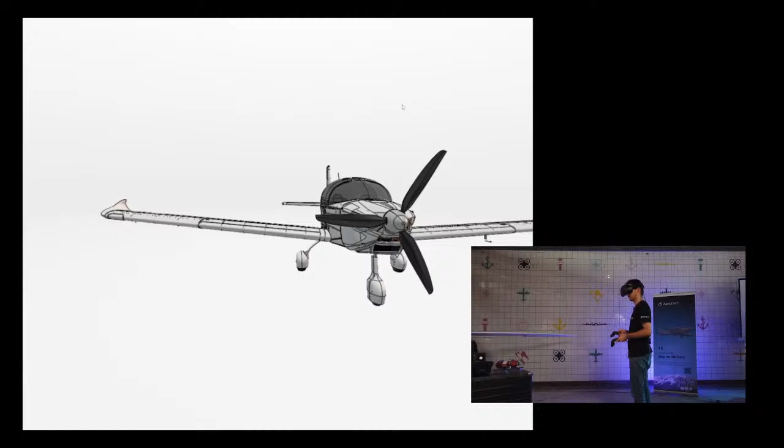All right, thank you, Alex, for joining me on this tour. Thank you all for listening to me, and I hope you have a great day. Thank you, Floris, really nice tour, really nice to see that plane. Can't wait to see it in real life.

I hope you enjoyed that video that Alex and Floris made together, taking you through the whole full-scale aircraft and all of its components. I hope you learned a bit about how the system works and how intricate all these components fit together within a pretty small form factor.

Of course, we had to take out these 2 seats in the back, and maybe at the start of the presentation you thought, why would you take out 2 seats in a 4-seat airplane? Well, this is why, because otherwise you wouldn't be able to fit any of the systems in there. So I hope that gave a great insight.

As Matthew also mentioned, it's an enormous achievement that we've been able to acquire the aircraft, and that's all thanks to these full-scale engineers here today who have been working tirelessly to get this aircraft and its system design ready. It's so cool to see how a year ago we did all the interviews for the full-scale engineering applicants, and we selected the most ambitious and motivated students to work on these projects. But a year later, to see how all their work has transpired into real progress, that's an achievement in itself, and something very rare.

I've seen companies on the other side of a Zoom screen, someone starting the meeting very bored, and then the full-scale engineers start talking, and you see them light up and become inspired by the work they've done. But of course, none of the full-scale work would be anything without the foreknowledge of the prototype engineers and all the work that's been done there.